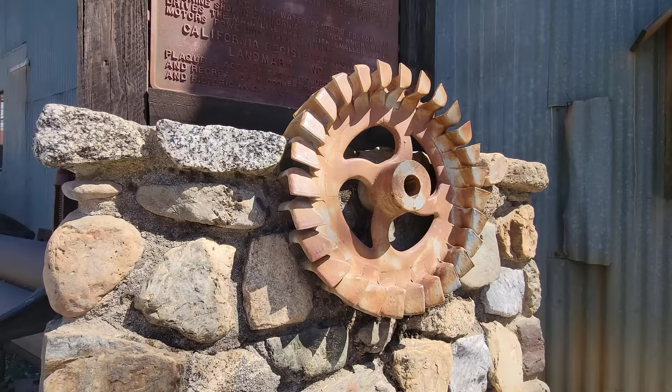Hello, I'm Joe Harrelson. I'm one of the volunteers here at Knight Foundry. I'm on the board of directors, and also I am the site's pattern maker. My original professional background is in mechanical engineering, and I was a professor of mechanical engineering for about 23 years in my career.

I'm Lindsay Jones. I am a member of the restoration and maintenance crew on Wednesdays and also a docent here at the Foundry. I've been here for about 3+ years. My background is information technology, and I retired here and have learned a lot about something I knew nothing about.

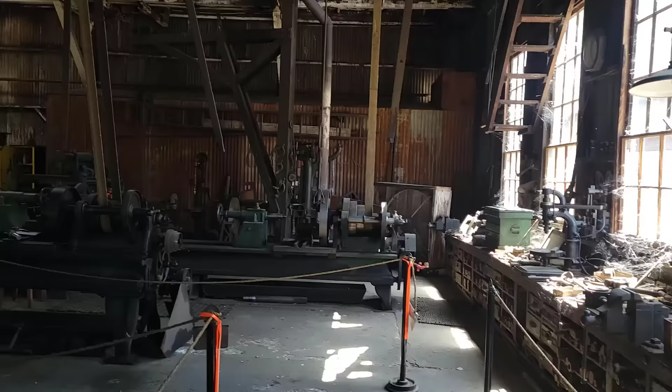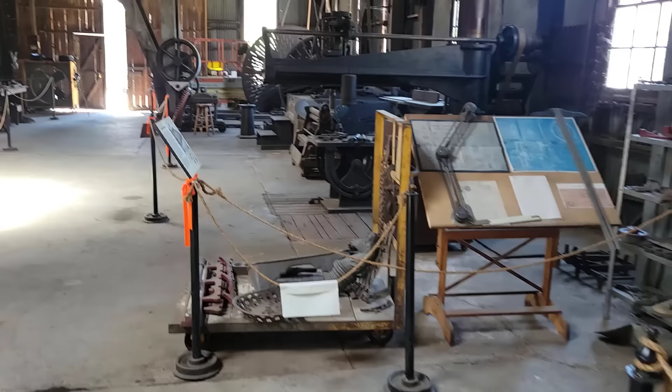The Knight Foundry is a cast iron foundry and machine shop which was in continuous operation for 123 years, between 1873 and 1996, before being preserved as a working museum. Today we have a time capsule, because nothing much has changed in this machine shop and foundry since the late 1890s up until the early part of the 20th century. Reportedly, Knight Foundry is the nation's last water power foundry and machine shop, where the mechanical power generated by water turbines is directly used to run the machinery without being converted to electricity.

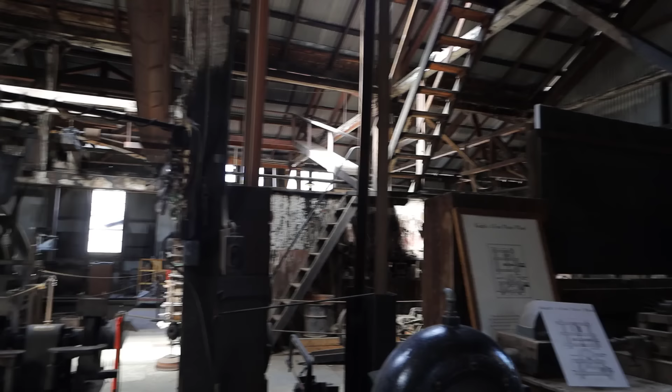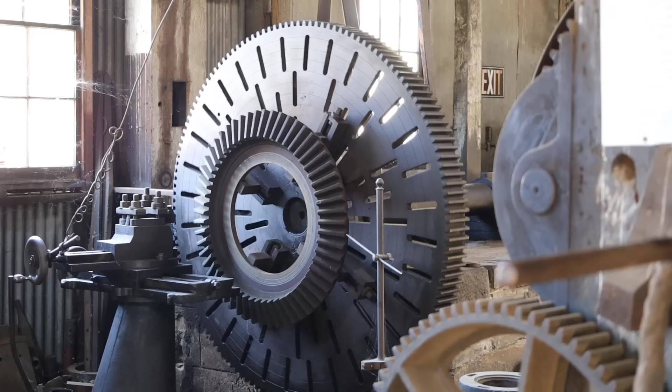Knight Foundry began in 1873 in Sutter Creek, when Samuel Knight bought a part interest in an existing machine shop and foundry called Campbell and Hall. At the time, there were at least 3 machine shops and foundries just here in Sutter Creek alone. The reason for that was the hard rock mining boom that was going on.

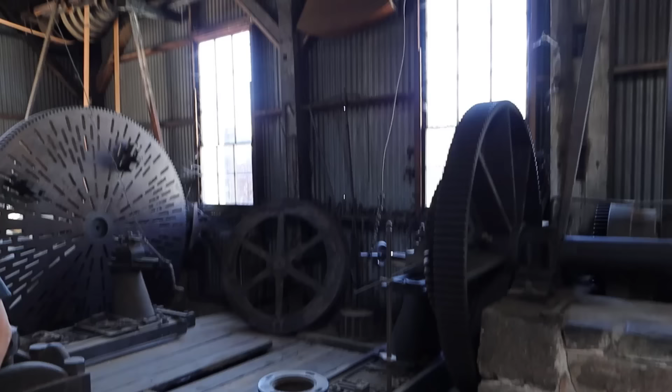They had been mining placer gold since 1849, but as the easy gold had been found pretty much, that industry was dwindling, and people discovered that some of the gold was coming from rock, particularly quartz seams, so they began to try and mine that. That type of mining is very industrial, requiring a lot of machinery and equipment. So all of these foundries and machine shops sprung up to manufacture equipment for gold mining.

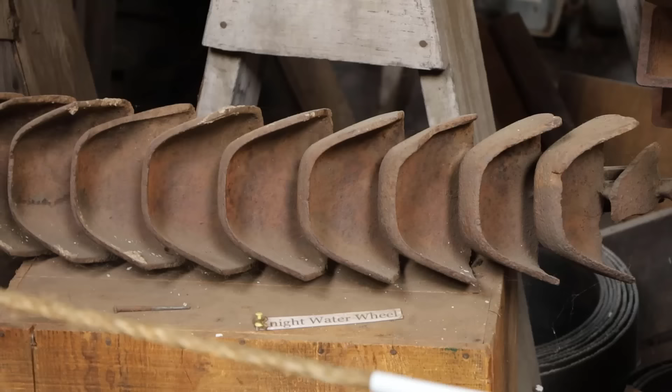Samuel Knight had been working for a while on a design for a water wheel. At the time, either water power or steam were really the only options to power the big stamp mills and stuff people wanted to build. He came up with a design, patented it, and bought a half interest in the Campbell and Hall shop so that he could develop his water wheels.

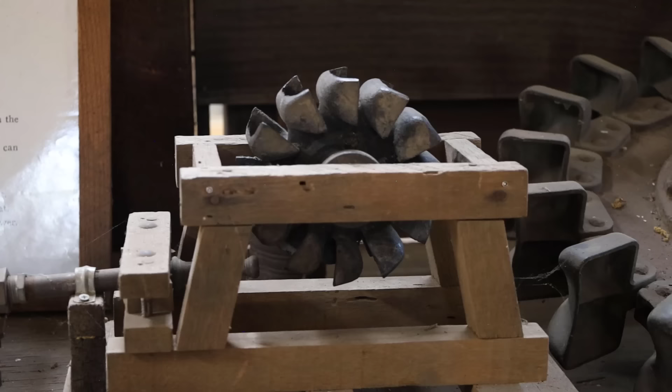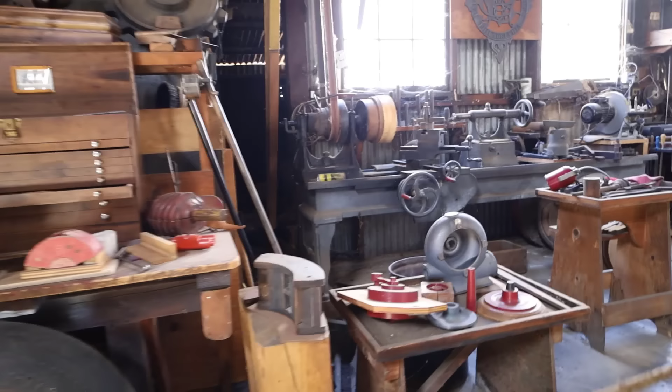Over time, the business grew to the point where they were supplying anything and everything you needed to mine gold, from rock crushers, stamp mills, ore carts, even picks were made here, and they also made a lot of pipe. For a long time, that was the primary business, as there were many mines in the area and a lot of market for the equipment they were making.

But eventually, mining began to slow down, and they were able to begin to serve the timber industry, which began to grow, and at one point there were quite a few sawmills in the area. So they provided a lot of hardware and equipment for sawmills. The place continued in operation after Samuel Knight died, although Knight seems to have been the brains of the outfit and the one who came up with so many of the ideas, and it became more of a job shop after Knight passed.

But they continued in operation right up until 1996, which was the last iron pour that was done commercially.

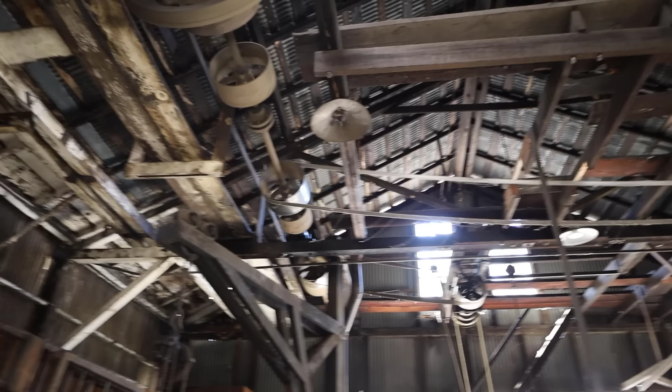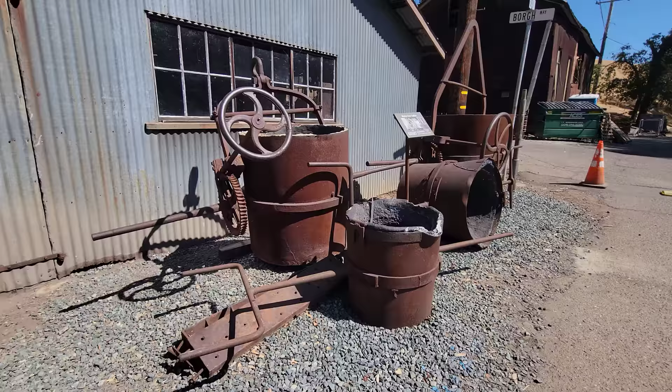Whenever I visit a museum or historic site, I always ask myself, or a docent if available, how this museum came to be. In this particular site, out of all the workshops and foundries in the region, how did this one survive and become a living museum? When I asked this question, this was Lindy's response.

Probably the biggest reason for that is the people who took over ownership, as ownership changed, had grown up and worked in the foundry. So there were no outside major influences coming in to make changes.

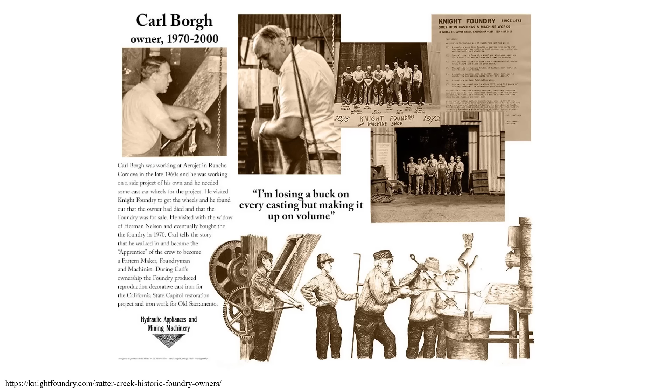It stayed very much a continuous run of the same people who were taught by the people ahead of them. It went through, I think, three major ownership changes if you look at it on paper, but there was very little changed until 1970, when an outsider, Carl Borgh, came in and ended up taking over the foundry. He tried to make a go of it and was not particularly successful because the market had dwindled to such a point, which is why the foundry basically stopped production in 1996.

One of the things that's remarkable about Knight Foundry is that it was a full-on engineering operation, much more than just a machine shop and foundry. They had a full line of complete finished products. They shipped stuff all over the world, had patents, advertised in trade journals, and had sales agents.

Originally, in this part—this is the pattern shop here—there was a second floor up above. Unfortunately, there was a fire in the 1930s and it burned, but that second floor was the engineering and design office, where they created the drawings for the various products they made.

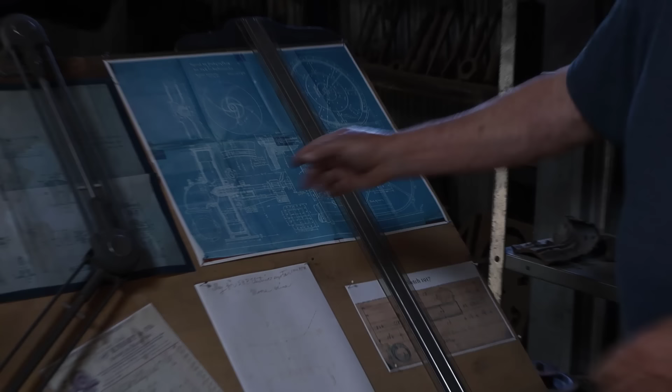Here we have some examples of drawings that were made here, some of the products that they designed. We have an archive and a number of the drawings, and they're really quite interesting. This one, for example, is actually reduced down from its real size; the real drawing is quite a bit bigger.

This is very different from modern engineering practice because they only made one drawing of the entire machine. It has no tolerances on it, actually fairly few dimensions, and the pattern makers and machinists were expected to fill in the blanks. They would presumably understand that this was a shaft and a bearing and therefore make it with the appropriate fit, but there weren't any tolerances at all.

Also, they would post this drawing up, and then the machinists or pattern makers would come and measure the drawing and scale it from that. So on modern drawings you see a note that says 'Do not scale,' but in that era, they did scale it.

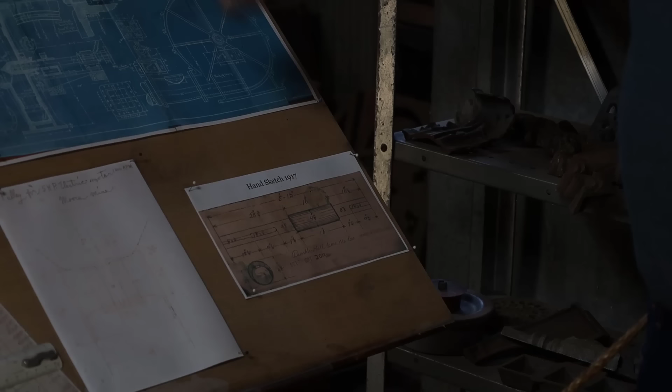Normally in modern practice, a thing like this large dredge pump, we would make drawings of all the individual components, but they didn't—they drew the whole thing in one big picture.

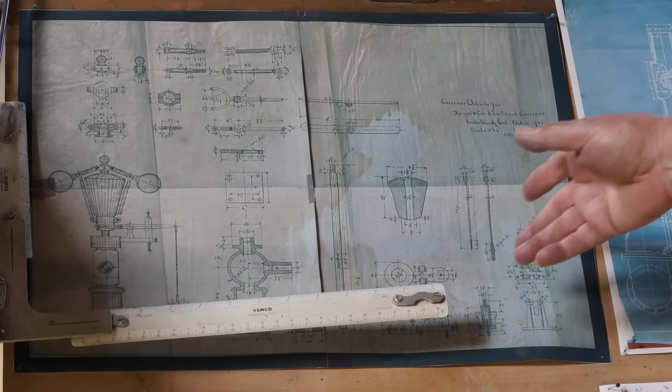Here, though, is a single part, and this is typical where someone would come in and want a replacement part or make a one-off piece. So here we have a drawing that was made for a governor. Knight has a patent on governors for water motors. This one is a little different from the other one because it does show individual parts, and there are more dimensions here.

Yeah, and one other thing that's kind of interesting about the drawings: in modern practice, they typically have quite a few signatures of who drew it and who designed it and so forth. But a lot of our drawings are unsigned.

However, the ones that are signed, we determined that the person who drew it was a pattern maker, and all of the names we have from the drawings are pattern makers. So we think the drafting skills that a draftsman needs are very closely related to the layout work that a pattern maker has to do.

Okay, so here we are in the pattern shop at Knight Foundry, and you can see a series of patterns for different things. This pair of patterns is to make the housing for a Knight water motor, and a pattern is basically a tool that is used to make a sand mold. Once the mold is made, that's where the iron is poured in.

So here we have one of the Knight water motor wheels—this is actually a reproduction that we've made here recently, but this was the smallest size water motor that Knight produced.

After I recorded this episode, I revisited Old Sacramento and found one of the restored buildings that used the decorative items manufactured at the foundry.

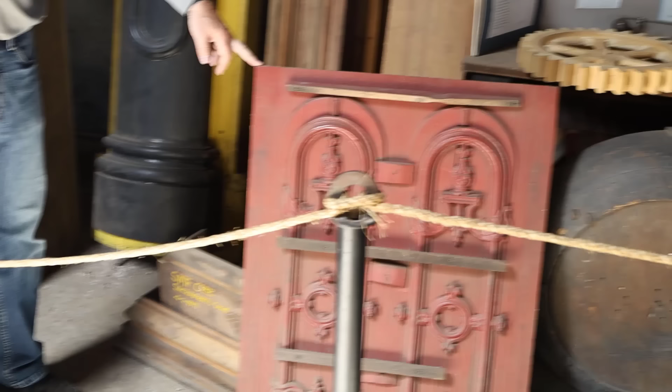Also, work was done to restore the state capitol. This piece down here is a pattern to make railing fill-ins. This restoration work was some of the last projects. We also have a circular staircase that was used in a firehouse.

Here on the wall is actually a pattern to cast a decorative piece for a Baldwin locomotive. The Nevada State Railroad Museum up in Carson City was restoring a locomotive called the Inyo, and it had originally been built with a piece like this between the drivers, the wheels. Unfortunately, it had disappeared, so they recruited Knight Foundry to produce a replica.

They made first a wooden pattern, then cast this cast iron pattern from that wooden pattern, and then used the cast iron pattern to cast a bronze replica of it. That is to be seen right now up in Carson City.

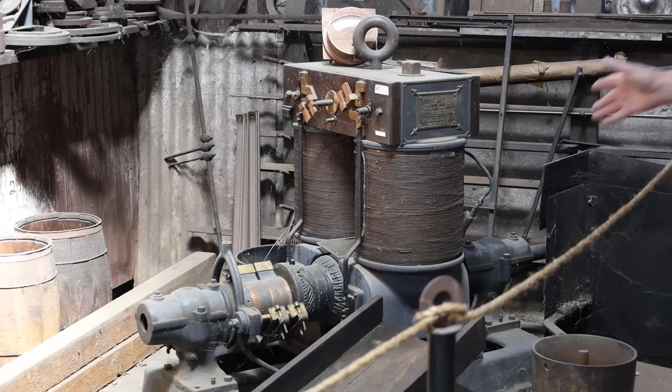So here we have an Edison dynamo from about 1890 to 1895. That was an era in which they had a dynamo located in this particular spot, but we're not sure if it was an Edison dynamo. We don't know what dynamo they had, but this is of the correct age. This one, interestingly, came out of the library at UC Berkeley and was donated through a series of donations, and ended up with us.

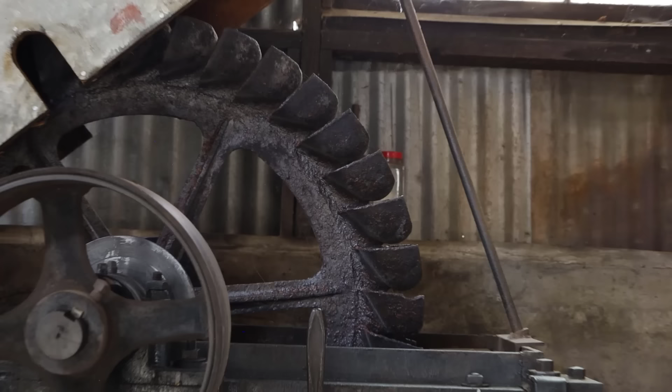So here we have the main water motor that powered most of the machine shop, and it produces about 35 horsepower, I believe. This is a typical Knight water wheel, and it was in operation right up until 1996. It was recently restored and is back in function—all it needs now is water, and it will work. That pulley up there drives the main drive line here, and originally there was a drive shaft that went across the street to the blacksmith shop.

But right now you have electric motors? Yeah. Yes. And when you're ready, I can turn it on anytime. Ah, okay, go ahead. All right. We're the only ones here, so... Fire in the hole.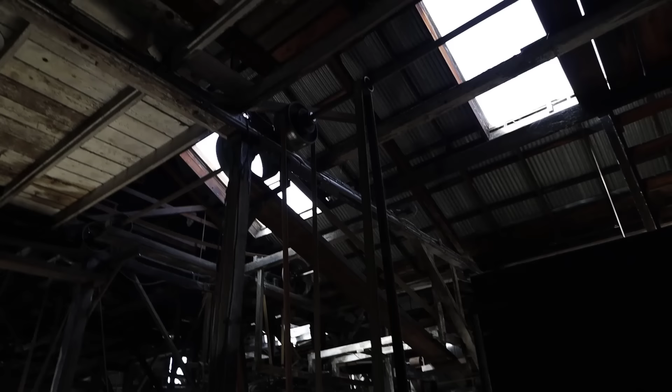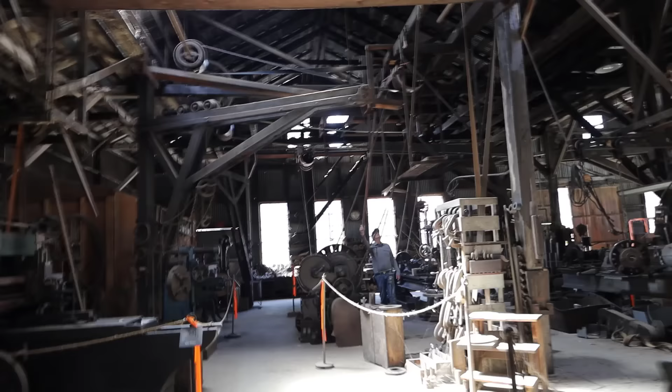Yeah, there's a lathe down here. That's a rather interesting lathe too. First of all, it's got a rope drive instead of a belt drive.

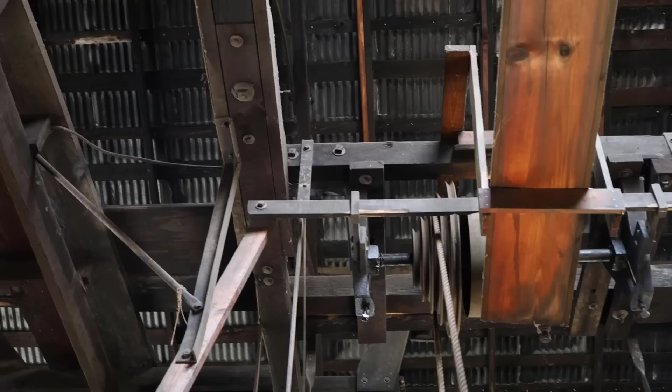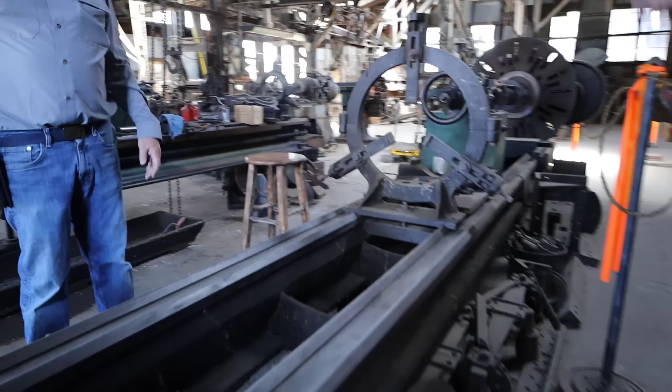The other thing that's really interesting about this is you notice it's got a headstock at both ends, which is very unusual, to say the least. So this is all one bed. One of the reasons they had this so long is that when they were making stamp mills, the stems in the stamp mill are really long, and so you need a big lathe. Like that one wouldn't be long enough.

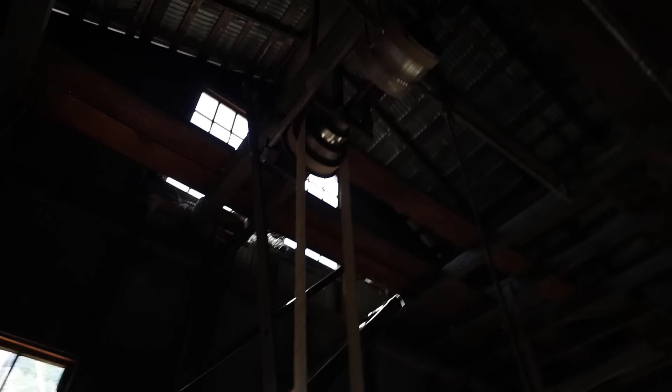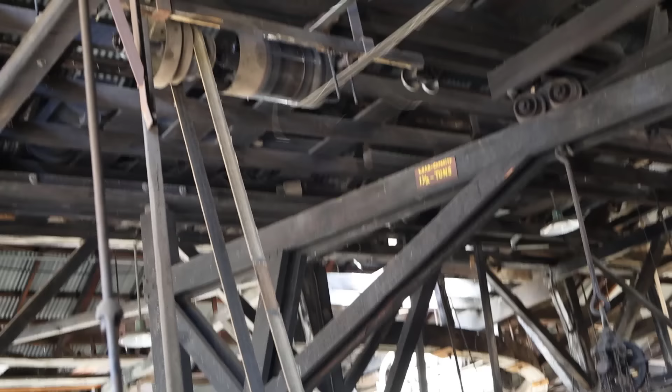This is basically our on-off switch. You can see I'm shifting the belt from the loose pulley to the fast pulley. The loose pulley just freewheels on the shaft, and the fast pulley is keyed to the shaft, so by shifting the belt from one to the other, that's how you engage it. This is actually a very old-fashioned system. In the late 1800s, they had clutches instead of shifting the belt like this, so that's actually quite old. That fixture is to take an Edison bulb.

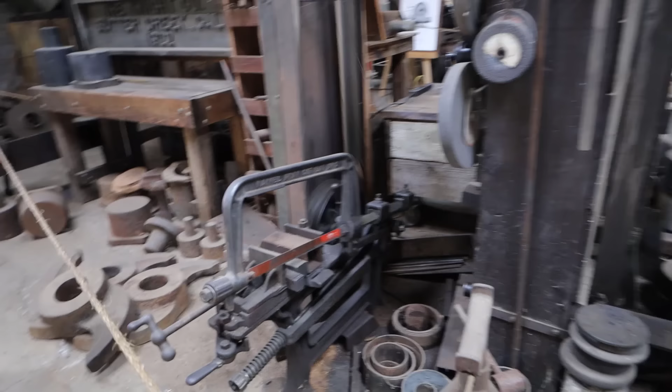As you can see, several driving shafts are extended along the machine shop over all the machines, and each machine can take the power it needs from one of these main shafts, usually via a belt, but in at least one case, as you saw, via a rope. For example, here you can see how this saw is powered by drawing rotational work from the main shaft via this belt.

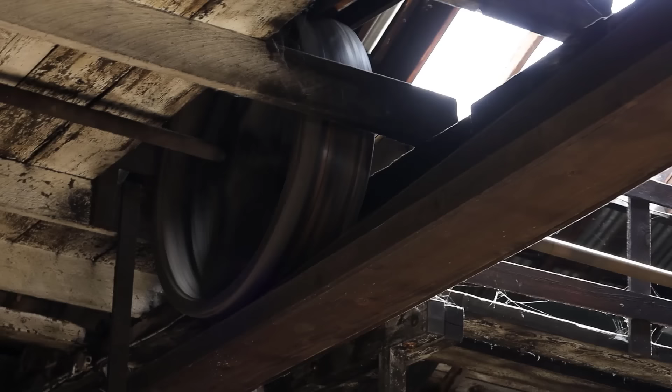This is the main pulley that originally was powered by the hydro turbine, but now it's powered by an electric motor, and then the main shafts receive their power directly or indirectly from this driving pulley.

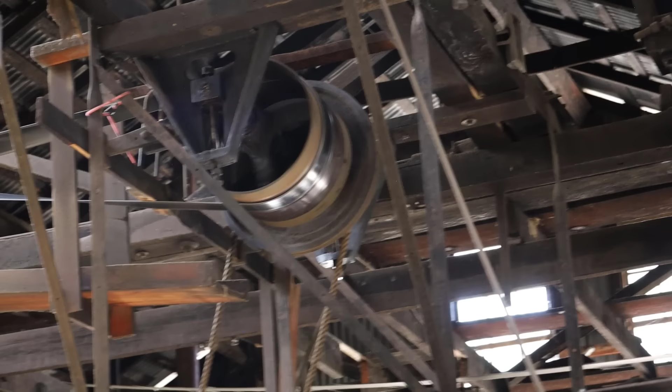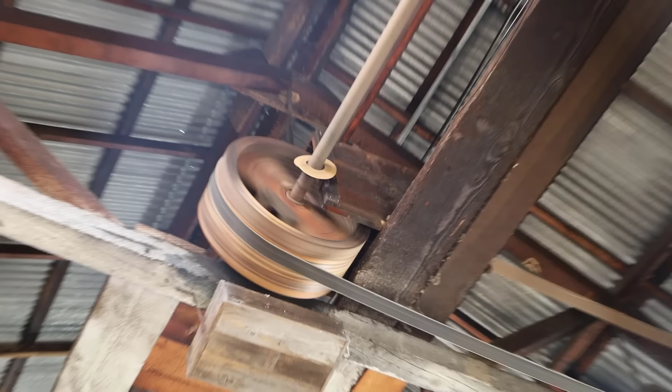As you may have noticed, some of these pulleys have a single drum, and some of them have several drums with different diameters. As you may expect, these different diameters serve the same function as a gear in your bicycle does; they provide different rotational speed for the machine. So if a machine only operated at a single speed, they had only a single drum. But if the machine required different speeds for different performances, they could use this mechanism to provide variable rotational speed for that specific machine.

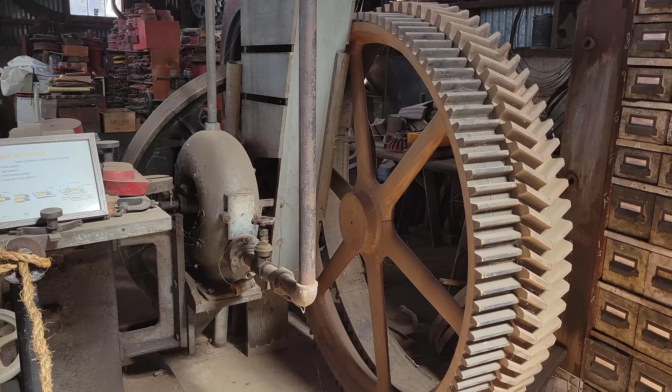While the power required to operate most of the machines came from the main water wheel, there were several smaller turbines used to power one or two individual machines located in spots in the machine shop that were not easily accessible by the main shaft. For example, here you see this small water wheel is used to run these couple of pieces of equipment in this corner of the machine shop.

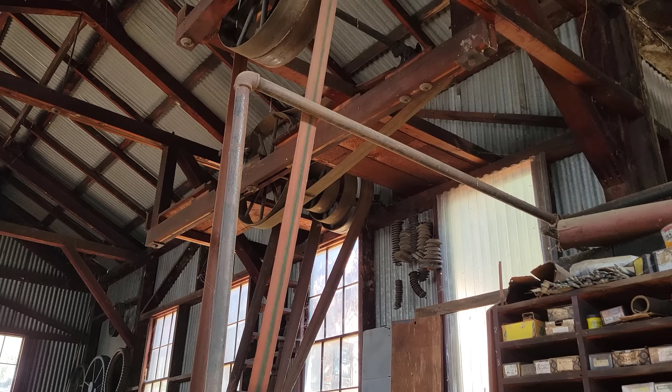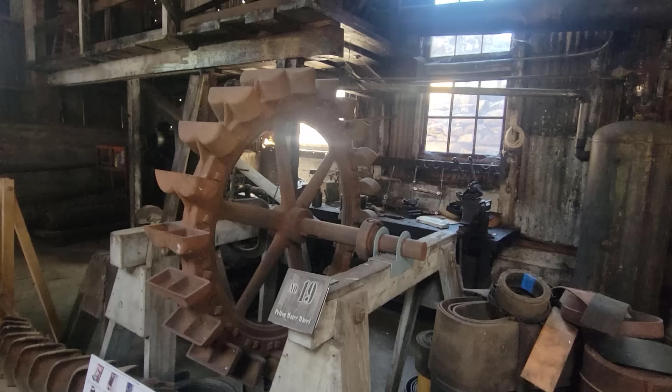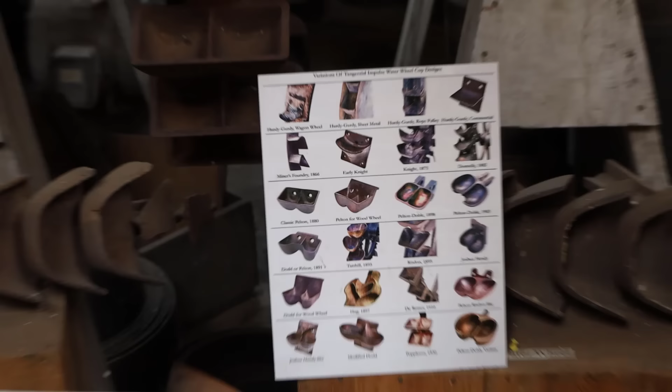Or similarly this one, and you can see how the water is provided for this water turbine. It turns out that while Knight came up with the first design for an impulse water wheel, he was not the only one. Many people came up with their own impulse water wheel designs, and in this corner of the museum you can see a nice collection of some of those designs. Here's Knight, and here's Donnelly, and somewhere there's Pelton, there's Miner's Foundry. So a lot of people were making these besides Knight.

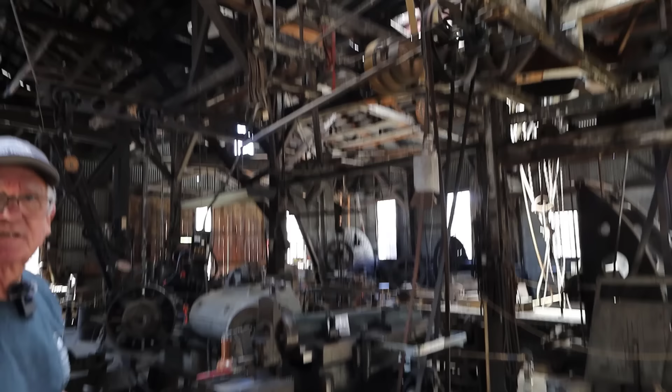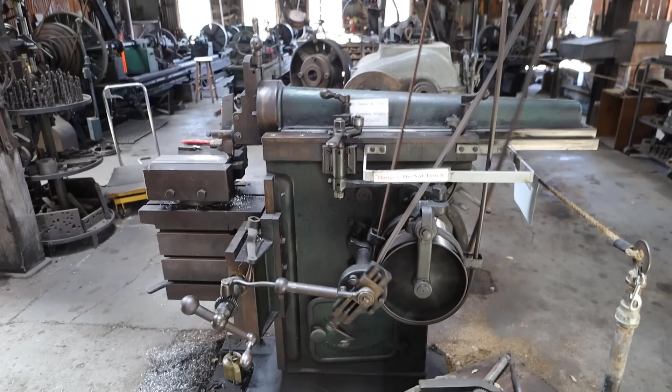So this is a Smith and Mills shaper, and basically the tool is going back and forth. This is the cutting tool here, and it's producing a flat surface. This type of machine is what was used before milling machines; this was the normal thing to make a flat surface. And then we have over there a similar machine called a planer. The planer differs in that the work moves back and forth and the cutter is fixed.

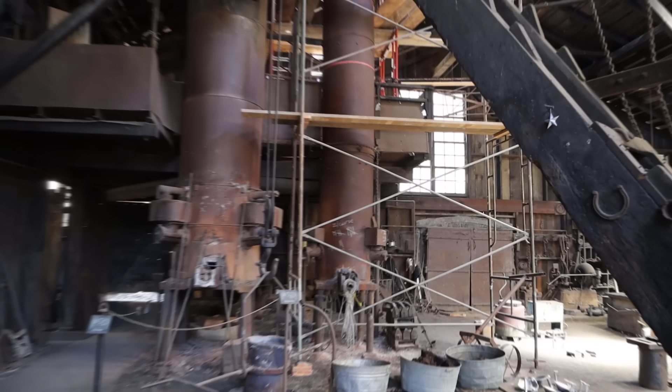Now we're in the main foundry at Knight's, and here you can see our two cupola furnaces. In the 1990s, they were using the big one here on the left, but it's no longer safe to use, and more recently we've been using this smaller one on the right. Basically, with this type of furnace, you put a mixture of coke and a little bit of limestone into it—it's like a big tube—and set it on fire. Once it's burning, you can turn on an air blast, and it gets very hot.

Once it's burning at a good clip and hot, you start throwing in alternate layers of more coke and iron, and it melts the iron pretty fast. You can see there's a spout here at the bottom; that's where we tap it out.

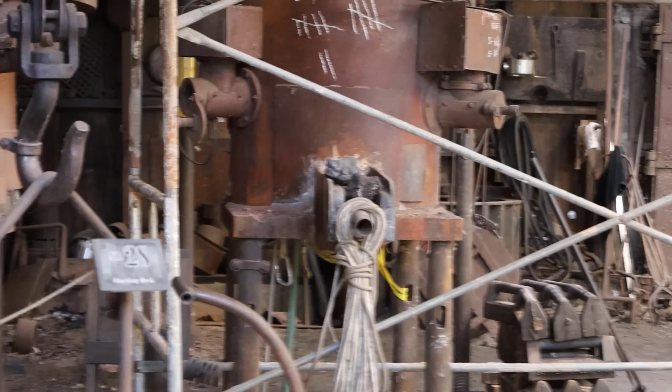So when we start the blast, we plug the spout up with a little lump of clay—it's called a bott. Then once we're ready to tap it, we take some of these long, harpoon-looking things, poke a hole through it, and it runs out into that ladle. Once the ladle is full, we shove another ball of clay in to plug it off. Our molds are typically spread around the floor here, and we use this crane to pick up the ladle, because iron is very heavy, and go around and fill the various molds. And this crane, they made it here, of course.

This machine is called a muller. You put your sand clay mix into the muller, add water, and these wheels go around and mix it. Then it can be dumped out into a wheelbarrow or taken to wherever you need it.

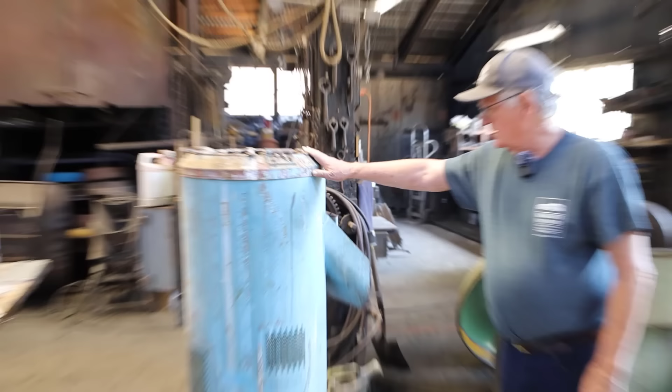This one is a similar kind of mixer, but intended to mix sand that has a chemical binder in it. This is a more modern machine, but they actually mixed the sand on the floor with shovels. I have an old textbook on foundry work that says a good foundryman should be able to shovel left-handed or right-handed. So usually you'd have two guys, one on either side of the pile of sand, and they would shovel it back and forth and periodically throw some water onto it to mix it.

The sand was a specific type? It came from... here is some that's kind of dried out. It's called green sand. You notice it's not green. The reason it's called green sand is because there's some other foundry techniques where they have a lot more clay and less sand, and then they bake it. With ceramics, they talk about greenware - it hasn't been fired yet, so this has not been baked.

And it gets black. If we're doing iron, we actually put powdered coal into the sand - it makes a better surface finish. But we're mainly doing aluminum, and so aluminum oxide is what makes it black. It originally was kind of tan colored, but as you use it over and over, it turns black.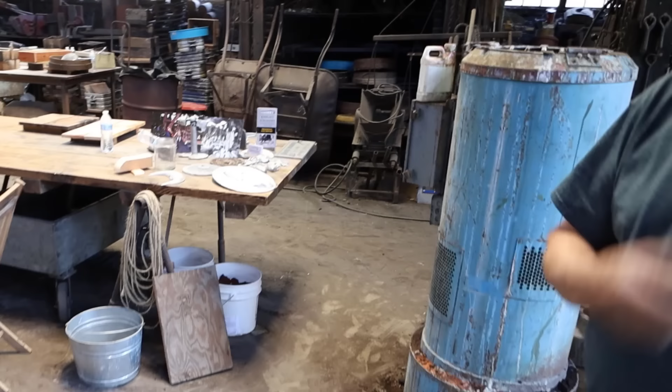And then we have another kind of sand that has an oil binder. You can see it here in this bucket - it's kind of red colored. We call it Petrobond. With Petrobond, you don't need to recondition it with water all the time like the green sand, and it captures really fine details, so for artwork and stuff, they like it. But it gives off a lot of smoke when you pour, and it's expensive.

How many people worked here at peak? Well, it seems to have fluctuated quite a bit, but those insurance maps I talked about said 35 people were working here. And what we know for sure is that some of them had other jobs, and when business got slow, they'd go do that.

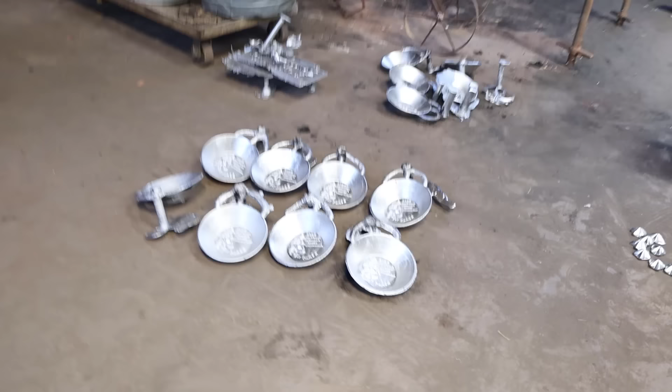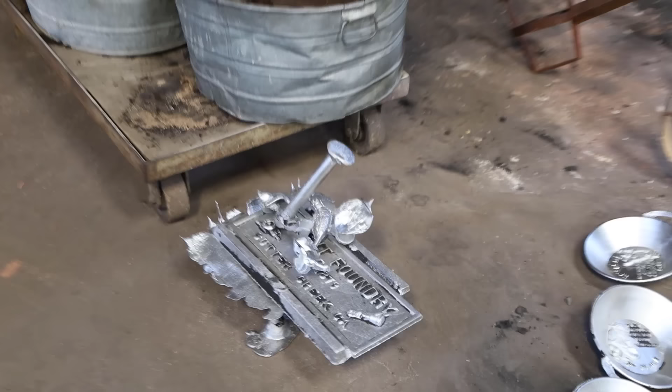So Dan Ramazzotti and George Chisholm, both pattern makers - Ramazzotti eventually owned it. They had a planing mill where they made wood trim for windows and doors and stuff right on the other side of the creek, but it wasn't part of this - it was separate that they owned. And they also built houses. So apparently, if business was slow, they'd go build someone a house.

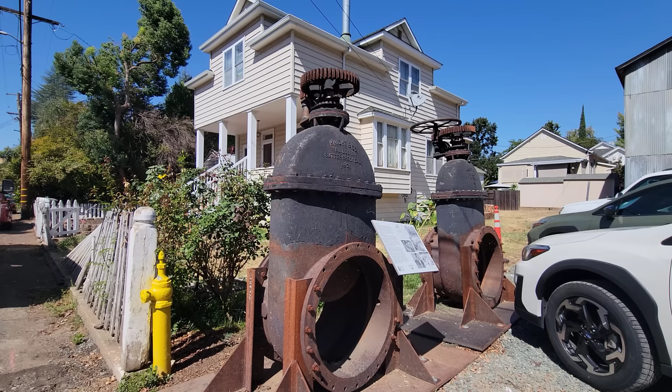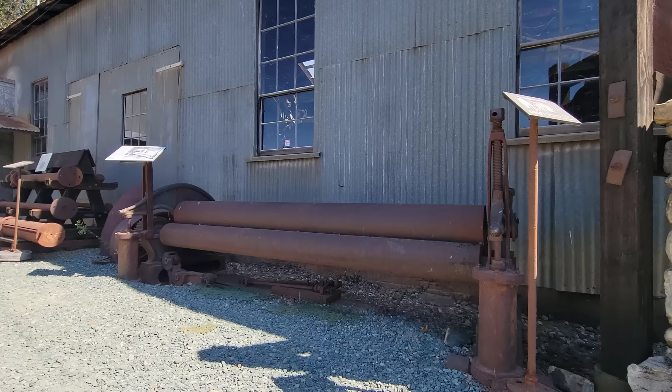Outside the machine shop, there is also a nice collection of some of the machines that were used in the machine shop, or some of the components and equipment that were manufactured by the foundry. For example, these are the gate valves that were manufactured here at the foundry by casting. These are the machines that were used to manufacture pipes - they were called pipe rollers.

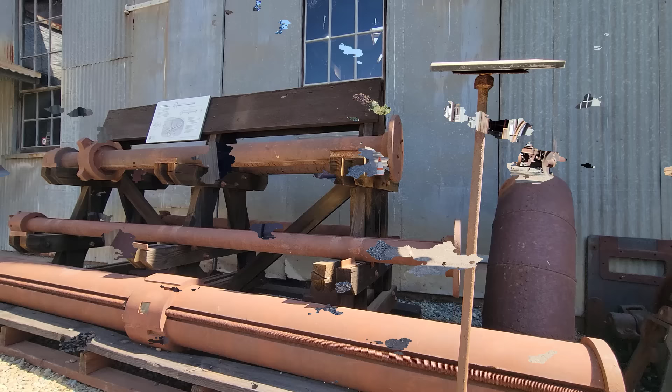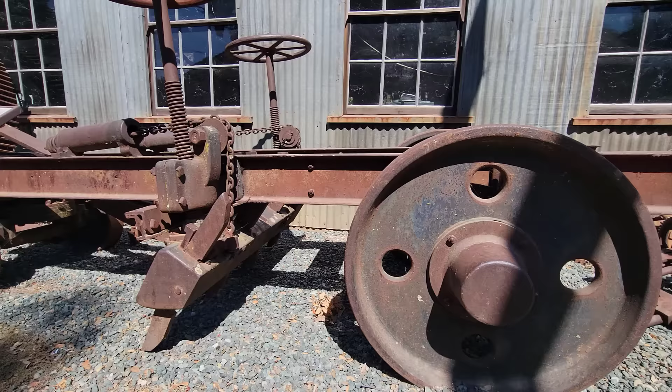These are horizontal boring bars that were used for a lathe. This machine was called a Knight scarifier, and it's used to make paved roads. Its function was to prepare rough and uneven road surfaces before final grading. As you can see, it was designed to be towed by a heavy tractor.

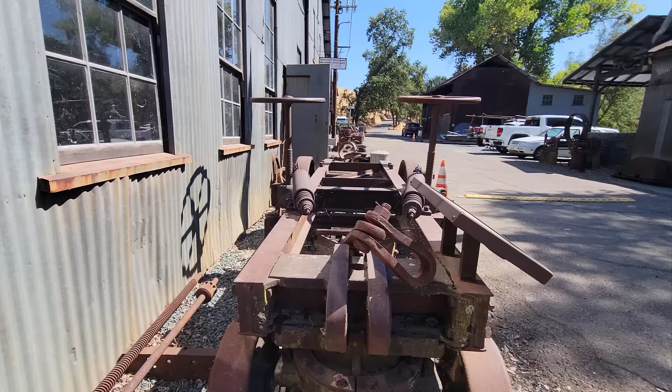The museum also has a functioning blacksmith.

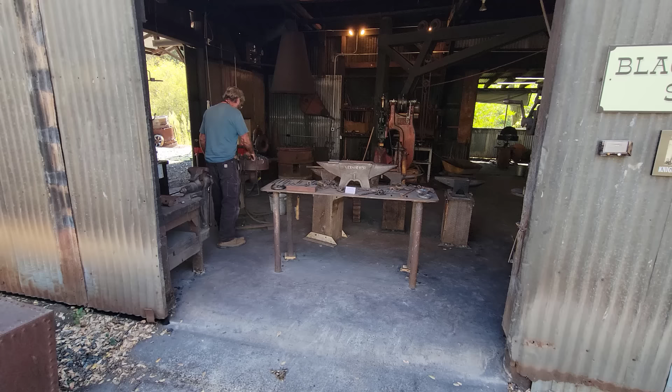This concludes this episode. I strongly recommend everyone to visit this living museum. For mechanical engineers, particularly those interested in manufacturing, it can't really get better than this, as I'm sure you noticed.